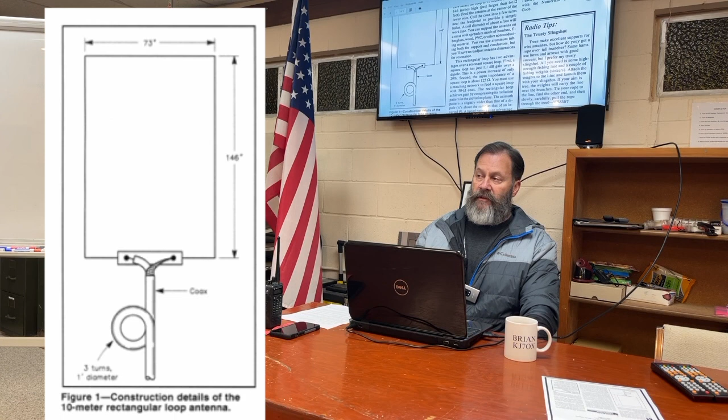And there's 2 reasons for that. It helps divorce the shield from the antenna, so it doesn't skew the pattern of the antenna. It also helps promote balance for the antenna. It keeps common mode from coming back down the coax and hitting your radio, creating other interference and other noise issues.

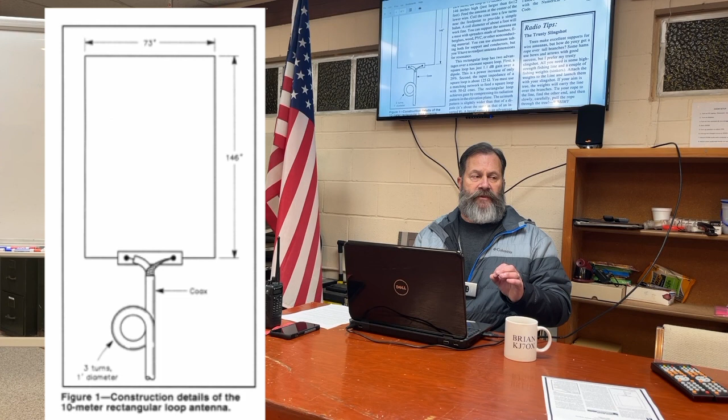So instead of the 3 turns, I decided to use 6 snap-on beads, which are mix 31. You snap it on, and I have about 1200 ohms of choking. Mix 31 common mode beads at 28 megacycles are about 200 ohms each, so 6 times 200, 1200 ohms of choking. Does it work? I don't know, but I'm going to do it. It's always recommended. I didn't have any issues before with common mode, but I wanted to add it just to be on the safe side.

Okay, so we'll get into the construction. In this next image up here, you'll see the horizontal pieces look a little bit fatter than the vertical pieces. And you'll see now I have a box kind of at the bottom, and we'll get to that in a minute. I'm going to go to the whiteboard here real quick. This isn't going to be to scale, but it is a construction method. So what I use is 1/2-inch gray PVC electrical conduit. So just picture a conduit on the top, conduit on the bottom.

And in this box here is where I made my termination. So I have an SO239 chassis connector. So just like the plug-in on the back of your transceiver, I wanted to make it plug and play. And this would be the center pin. So essentially the wire that's 35 feet long gets soldered to the center pin, comes out the conduit, through the upper one, back down again, through here, and this has a ring terminal soldered to it, and it goes to the ground side. That's what that does. So that creates the loop.

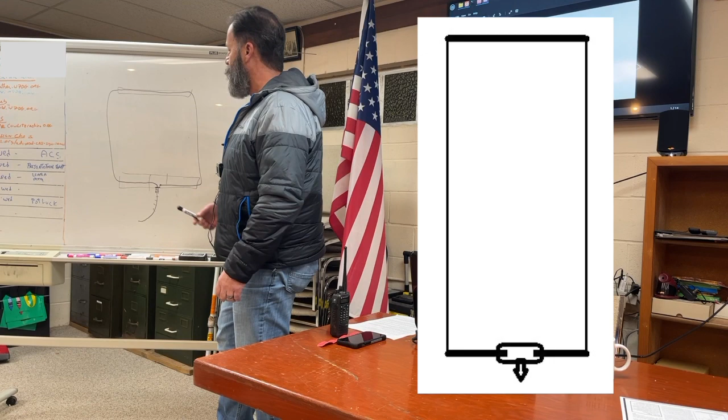And your coax plugs in here, and you can put your beads, or you can put 2 or 3 wraps of coax, about 1 foot in diameter or so. But that's the basic construction shape. And I had all the parts except for the gray conduit, and I think that was 16, 18 bucks for a couple of sticks. Pretty cheap. And I got gray because it's UV stable. Water pipe PVC is not. It'll fall apart in a few years. Gray electrical EMT PVC.

Nope, it just hangs. Yeah, it's totally gravity. So, good question. I'm glad you brought that up. So, my coax is RG213, so it's about 45 feet off the ground, 40 feet, so almost 12 meters high. And so, it creates some weight. And I didn't want to pull this lower spreader down with the weight of that. I wanted to try to maintain a shape.

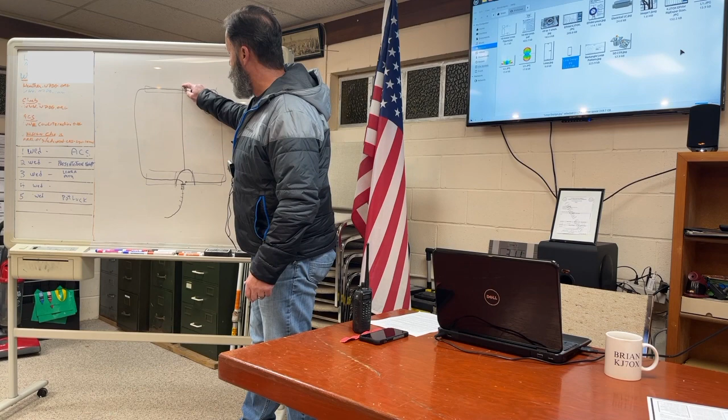So I basically just created a loop here of black Dacron rope. You can get that at HRO, DX Engineering. It's UV stable rope. And I ran that rope from here to the top, connected it, and then that goes over the tree limb and then down. So that supports it all the way through and then maintains a shape. And I've got a photograph of that here too, installed. Any questions so far? Okay.

And the other thing I had to do too, because there can be fading, they call QSB, QRN, and signals can be up and down depending on the time of the day, the band conditions, etc. When I first put this up, I experienced a lot of fading. A couple days go by and I didn't realize why I was having so much fading trouble. So I go outside and I look up in the tree and the antenna's not pointing east anymore, it's pointing south.

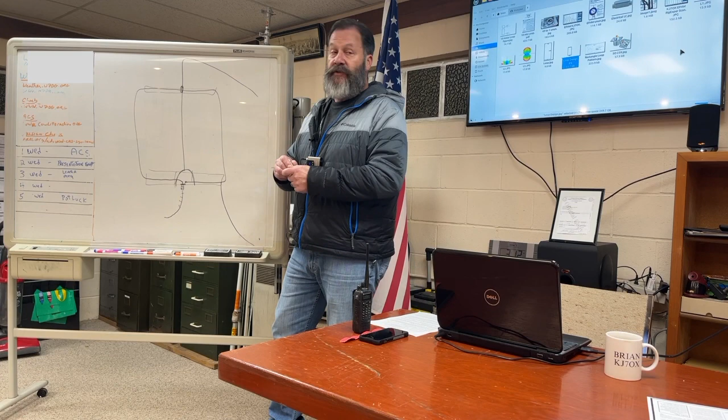It's going like this in the wind, turning. So what I ended up doing is I put a tag line off one end down to a tree so that it doesn't go more than a few inches. So that took care of that, so bear in mind. Yes? The rope goes to the tree. Yep. Okay, what's holding the other end of it up from falling down on the other side? Over here? What's that attached to?

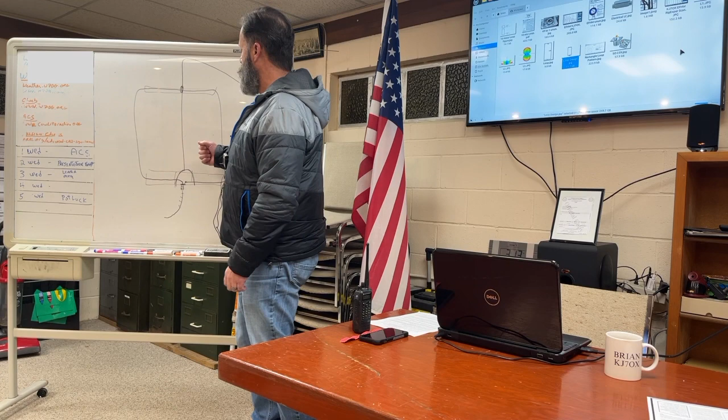So the rope is connected to this lower piece of PVC and it's connected to this top piece of PVC. It's all balanced, so it's not tipping. It's perfectly balanced in this case. But if I was to pull on this tag line, then it would kind of go like this and become misshapen. So you could put 2 tag lines with equal pressure and keep it more stable. But you don't have a lot of tension or anything. No. Almost the weight of the rope by itself.

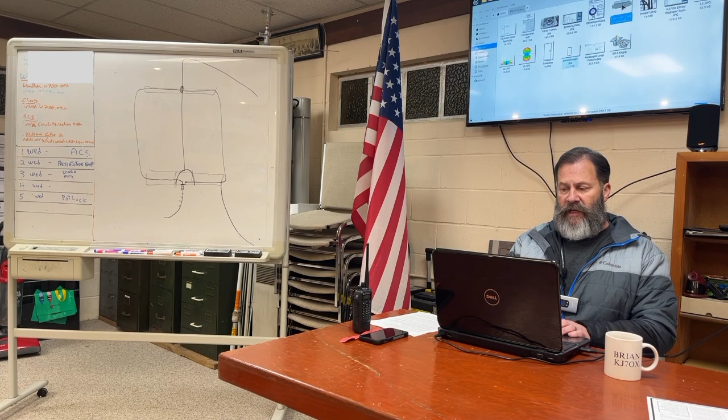I also did put a drain hole on both sides of that, in case any water comes down, kind of works its way down, it'll have some place to go. Just little things like that to keep in mind.

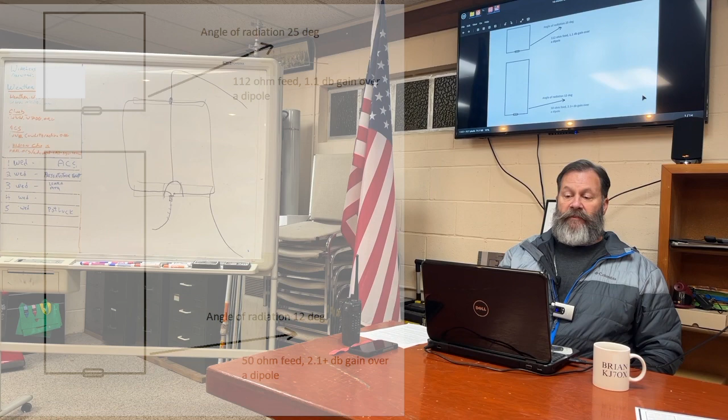Let's talk about some differences really quick between the square loop and the rectangle loop. Quick drawing I did, and the angle of radiation depending on height above the ground. And the first half wave off the ground with any antenna is the most meaningful. Everything higher just gets better. But there are diminished returns if you go too high.

So a square loop, a minimum a half wave off the ground or slightly more, is going to have, now this is in the vertical plane like this, straight up and down, about a 25-degree angle of takeoff. That's not bad. That's on par with the dipole, pretty close. And you'll see here where it says the feed point impedance is 112 ohms.

They may not look like it, but just picture, for the sake of discussion, that they're both 35 feet in circumference, okay? Just one's square and one's rectangular. And so in this example, a square loop has a bit over 1 dB gain over a dipole. It's not very substantial. You would think, well, why would I want to go through all this trouble if it's not much better than a dipole? And it's not much better than a dipole. That's a fact. But it's a lot quieter than a dipole.

And its 90-degree rejection, which means off the ends, is quieter than a dipole. So when you go into minus numbers, it's about minus 24 dB. So it gets pretty deaf off the end, which a dipole does too. And you can use that as an advantage. That's a great tool. You can actually turn it if you wanted to and block somebody else out that's maybe an offending signal.

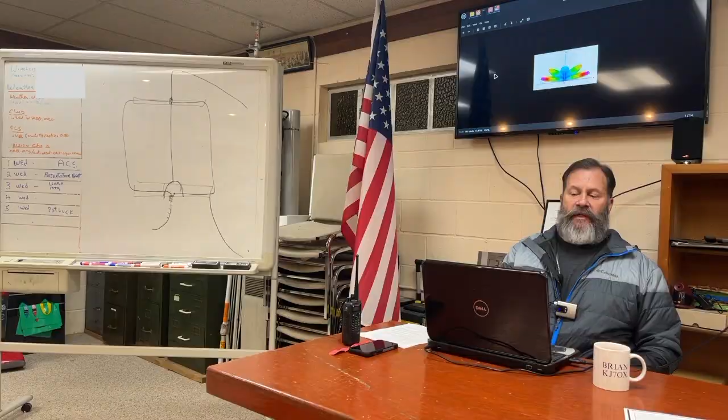So I also did a sort of a 3D colorized view of what the radiation would look like if we could actually see it. So it kind of looks like a flower, but again, standing on the pavement looking in through the antenna, you can see where the low takeoff angle maximum gain lobes are highlighted red.

So that's a really good pattern. And if you see down here at the very bottom, this little gap down here, about where my cursor is, about 5 degrees. And 5 degrees is always a great low takeoff angle test case when you're trying to measure antennas in software. 5 degrees is not easy to get. You can receive it, you can't always transmit it. So always have a test at 5 degrees to see where you're at.

It's okay if you're in minus numbers. Your numbers might be minus 5 dB gain. You think, well, I'm losing ground. Well, not really. It's just the number. It creates the shape that you see right now. It's kind of how that works.

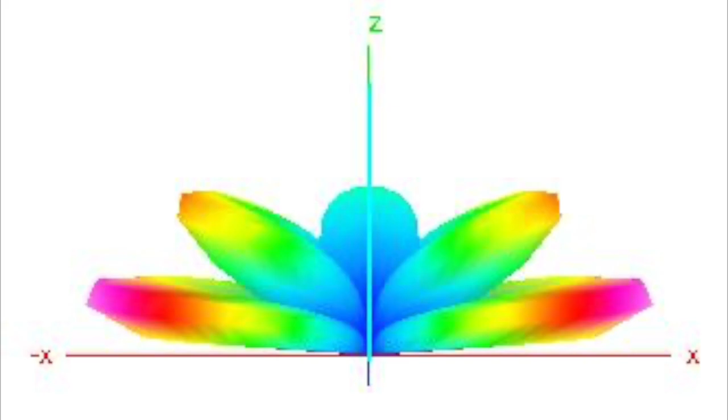Okay, and so now we're going to go to another view of the 3D plot, colorized. And you can see now the shape of the antenna that I drew in here with the colorized version on each side. So this is bidirectional, like a dipole, goes in two directions. I have it oriented so that the radiation goes east, or a little bit south of east, also west.

And from this particular location in the northwest, in this corner of the country, I get a wide splash across the whole lower 48 states with no nulls. And that'll be important for the next antenna we talk about here in about 5 minutes. And so I have that during the day, and then later in the afternoon I have JA, which is Japan, Asia, Asiatic Russia, Hawaii, Alaska, just pounding through the back end of this antenna.

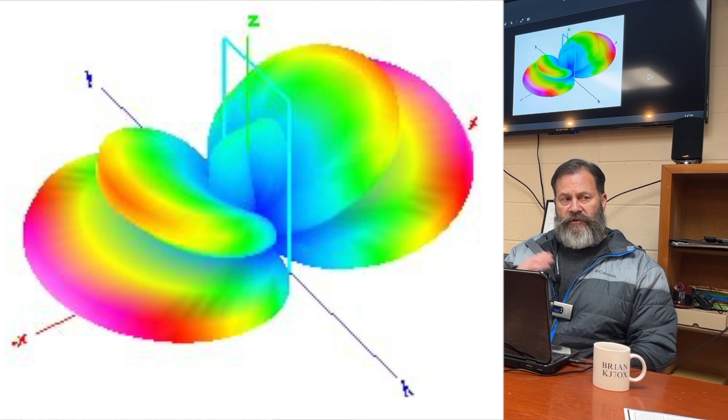And I have a bit of dirt in the way between me and ZL and VK, which is Australia and New Zealand and the deep South Pacific Islands. But once it gets closer to the equator, it frees up again and I can work some of those islands, like Midway and other islands. And there are special events that go to Midway and other places. So that's that particular version.

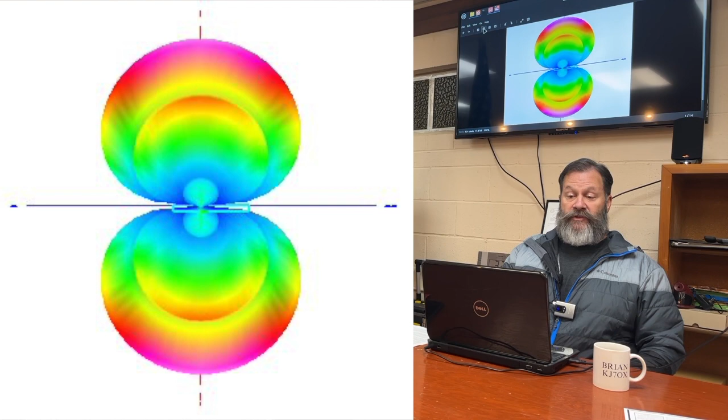And here is the aerial version of the same thing now, as if you were a bird flying over the top of it. That's what it looks like. So it's a really wide pattern, and that's good. You can use a really wide antenna pattern as a tool to cover a large area.

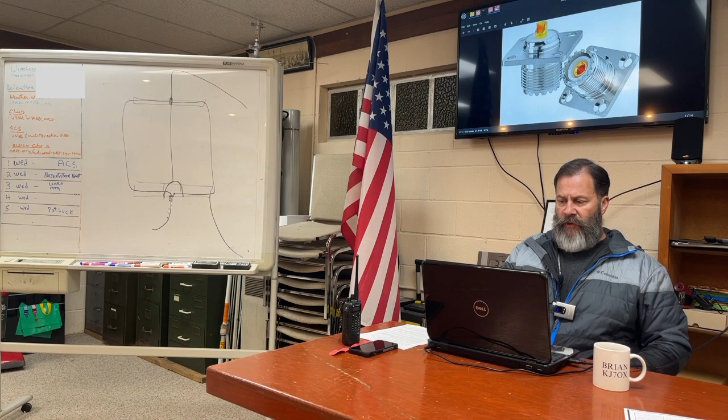So now I'm going to show you some other parts here. These are SO239 connectors. That's what your PL259 coax connector plugs into, like in the bottom of this image right here. So direct coax plug-in. This antenna probably weighs a pound, if that, very lightweight. You could actually take this on what they call a squid pole or a fiberglass pole, take it out in the woods and put it up in the air on a pole, throw it over a branch, take it portable. What is the actual wire that you use?

I'm just using 14 gauge PVC coated UV stable wire. You get it at DX Engineering for, I think it's 35 or 36 bucks for 150 feet. One second, Rick. When I first put this up, I didn't want to use my good wire for testing. So I built a Frankentenna. It's a Frankenstein antenna, several bits of copper wire, some insulated, some not, different colors. It was just a wreck.

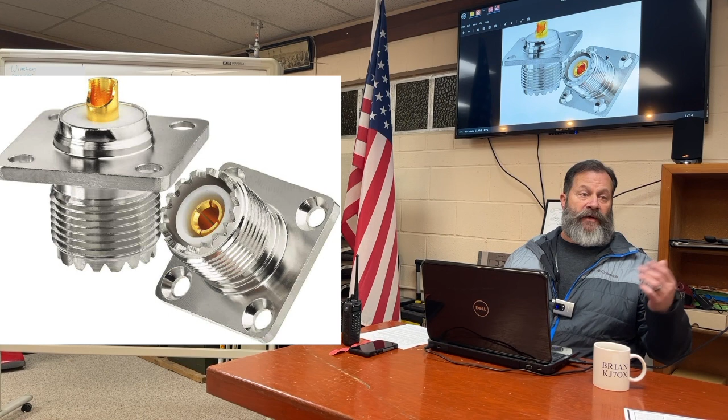But I wanted to get the full footage. I wanted to test it out for a month or so, and if it fell apart in place, that's okay. Before I pulled a brand new clean run of wire off the spool, I wanted to test it out. It's always good to do that. So don't throw your pieces of wire away. Test away with them. Yes, Rick? Stranded or solid? Either one. I'm using stranded.

I think it's copper-clad steel, good antenna wire, very strong, and you don't have to worry about it rusting. It's in a PVC coating anyway. The steel component just gives strength. Your signal that you transmit does not go in the wire. It's on the outside of the wire, so no problem with that.

Yes, Matt. I don't know if you were gonna cover this later, but is there a reason that you chose to have a vertical rectangle instead of a horizontal rectangle? Yes, it's quieter because it's fed at the bottom, and for the reasons that I've outlined, performance. Even if it was horizontal, you could still feed it.

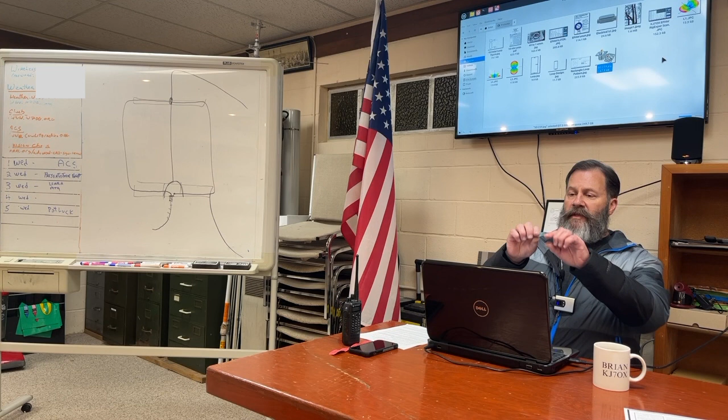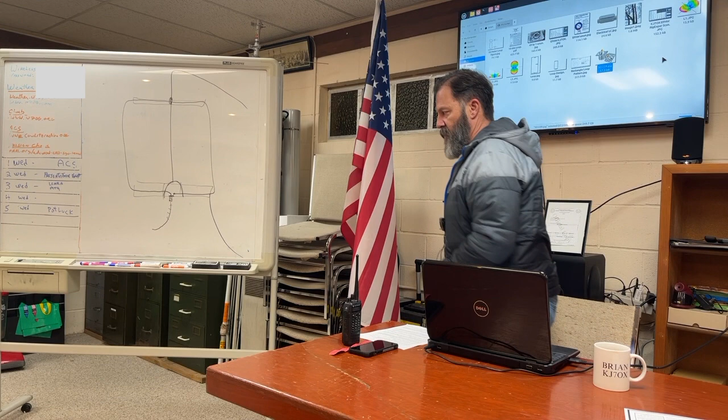You can do that, but you get different reactions, and you don't get the same performance because now you have more horizontal wire closer to Earth as opposed to less. Right. Because in the website that I'm going to share with you guys called Practical Antennas, that's the name of it, you can make different versions of this antenna, and I'll just draw one really quickly because there may be a need for you guys, based on the limited space that you might have, to make one like this.

Okay, so 50 ohms at the bottom because you have the exact same circumference. It's elongated, 50 ohms. Only requires one support to go across, and then the rope comes out the top. And this isn't going to drop or anything because the pressure of the shape of this holds that intact. What do you use to attach the wire to the rope? Well, you could just use zip ties. Just zip tie? Yeah, you can use zip ties. It's insulative, so that's fine.

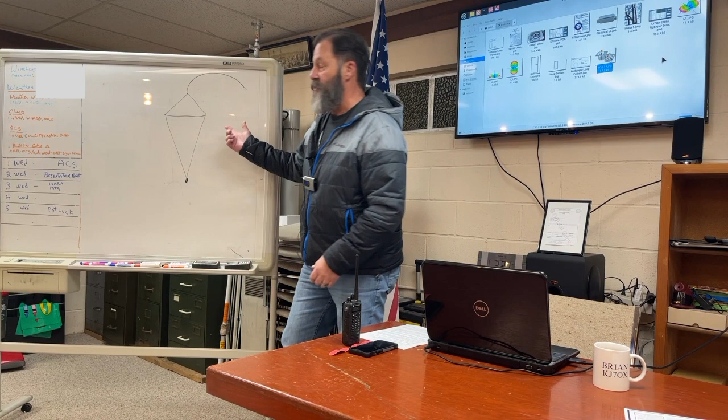That's just an example of a different shape that does exactly the same thing and has very nearly the same performance. Start with 35 feet of wire. And if you want to make it for 12 meters, it's probably 38 feet. You know, and there are people that have giant towers, 100-foot towers, and they can probably put one of these up for 80 meters. This guy's not one of them, but they're out there. So, and then we get to, what does it look like in the air?

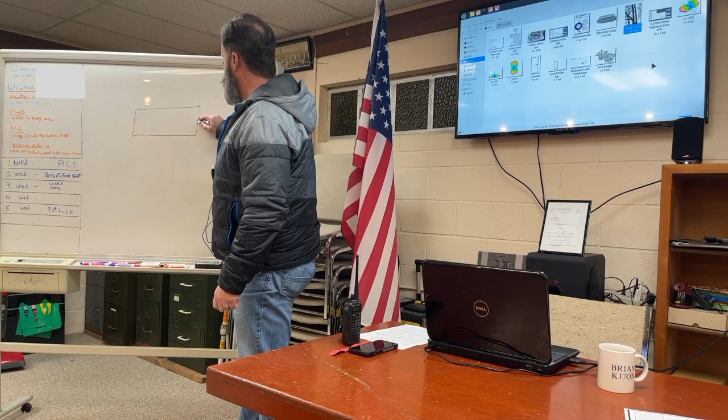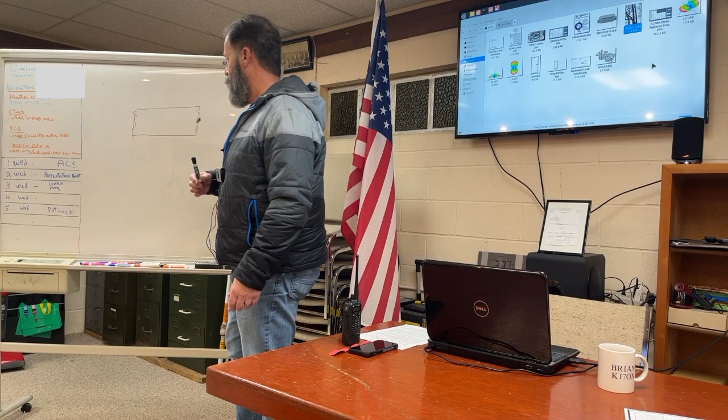So just take the same rectangle and then feed it on this side. And what you have now is essentially two verticals in phase. That's basically how that works. The vertical polarization with very low takeoff angle. But this antenna, you can be closer to the ground. It has different performance, not quite as good as this, but different people have different antenna designs for a reason. This might do a better job for a certain reason on a certain band than the other one. That's why hams have so many different kinds of antennas, because they have to do something different.